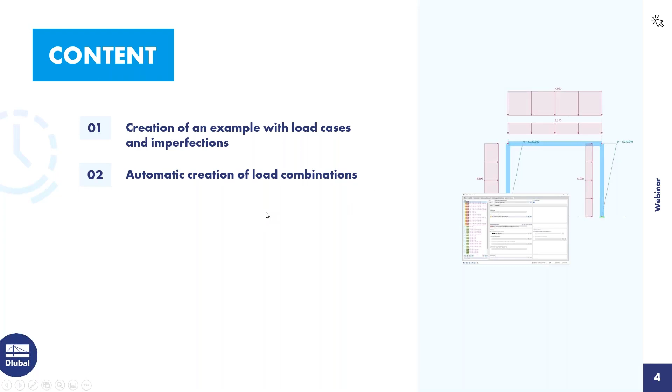To the agenda today, I will create a simple example. You can see that on the right side here. Steel frame, and I add load cases and imperfections. Then follows the automatic creation of load combinations. That's the main part of the webinar. Then reduction of the number of load combinations and consideration of initial states.

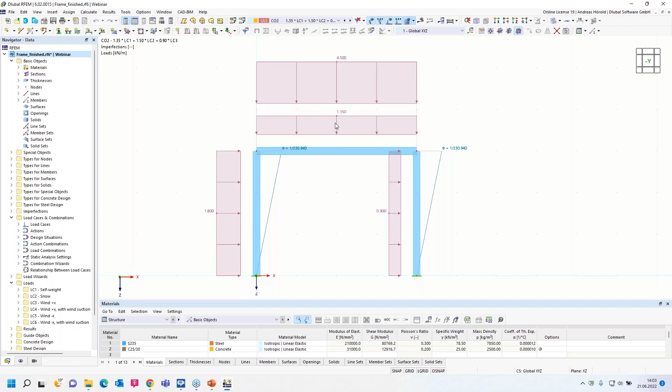Then let's turn to the program. That's the finished model, but to show you all options in all dialogues, I will start with a new model. Here left above, File, New. I call it Frame. 3D model is okay. Then it's important to check here Combination Wizard and Classification, that the load combinations are created automatically from the program. Load wizards for snow and wind. We don't use it for the steel frame. I can leave the check here.

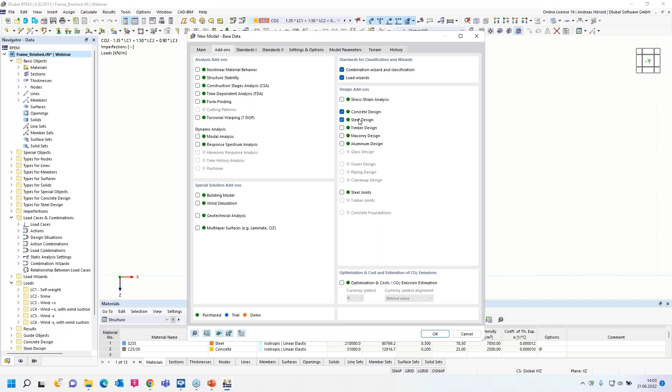I activate two design add-ons to show you where you can assign the design of the add-ons in the dialog load cases and combinations. So then standards 1, there are a lot of standards implemented for the load case classification and the combination wizard. I use the Eurocode 0, and we are here in Germany. I use the German National Annex, but as you can see, almost all national annexes from the European countries are included. We don't use any load wizard, but you have also a lot of standards implemented here.

Just a moment, I have to mute my colleague. Okay.

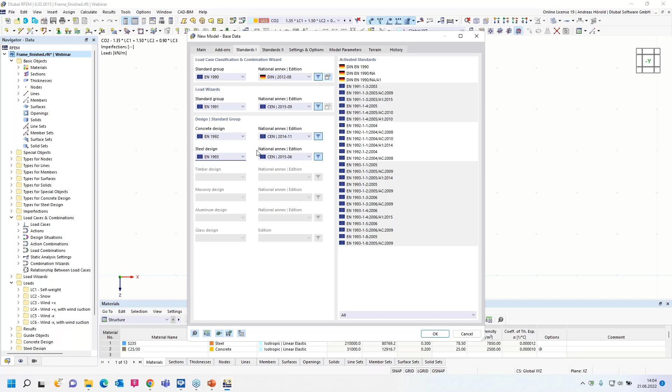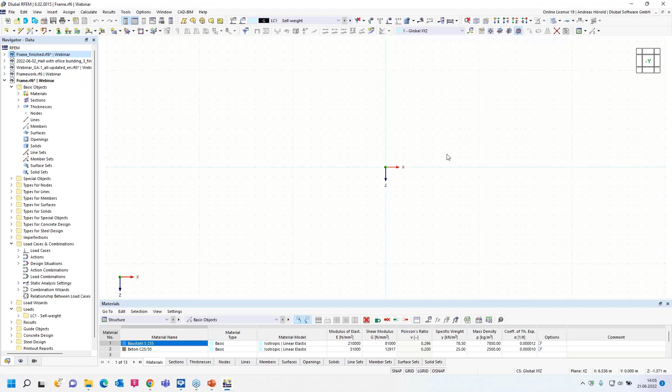Then, the design standard groups for concrete and steel, but since we don't do a design, I can leave the standard setting. Okay, then that's the new model. Here right above, I change the view in reverse Y direction and change the plane to XZ. So I zoom a little bit in and start with the first member here left above with a beam section. I use a section from the database, I-beam standardized.

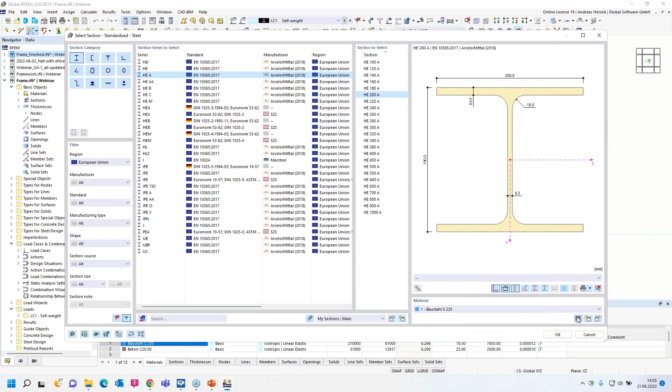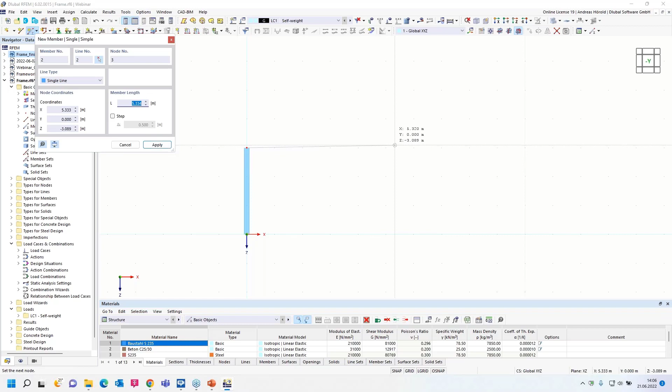HEA 200, and just a moment, I take a steel S235, okay, and leave the dialog. Okay, the column should be 3 meters high. Okay, then the horizontal beam 4 meters in X direction.

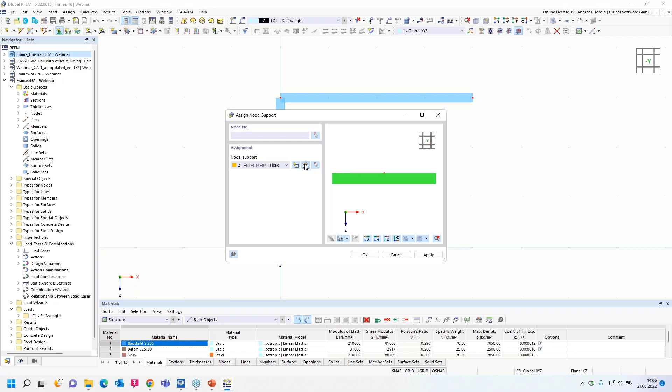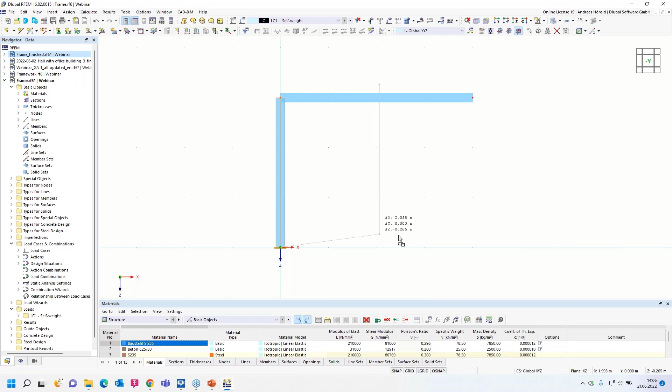Then I add a nodal support here left above, nodal support, and I use a fixed nodal support. Okay, we can take a look at the settings. Yeah, fixed in all directions. Also the rotational, all directions are fixed. Okay, then I add it here. And then with pressing the Control key, I can copy that via drag and drop to the other side. Now the frame is finished.

As you can see above, the self-weight load case is automatically created. We can add a member load for the self-weight load case, 1 kilonewton per meter. Okay, then I create a new load case with that button here, new load case, and I call it snow. I assign an action category according to Eurocode 0. In that case here, the snow ice loads with a height under 1000 meters. Okay.

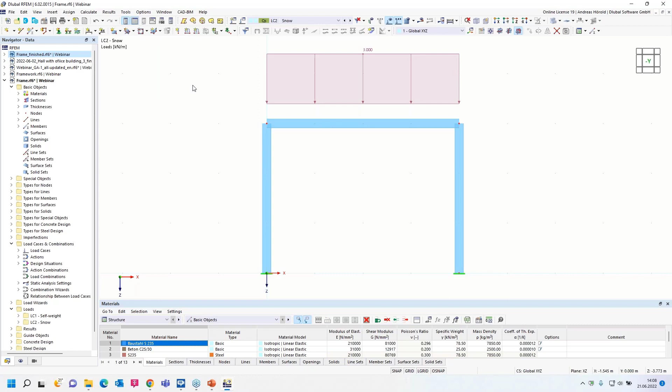So I add the next load. A uniform load, 3 kilonewton per meter. Okay, then the next load case, wind plus X. And I assign the action category wind. Okay. Member load again, this time in X direction, 2 kilonewton per meter.

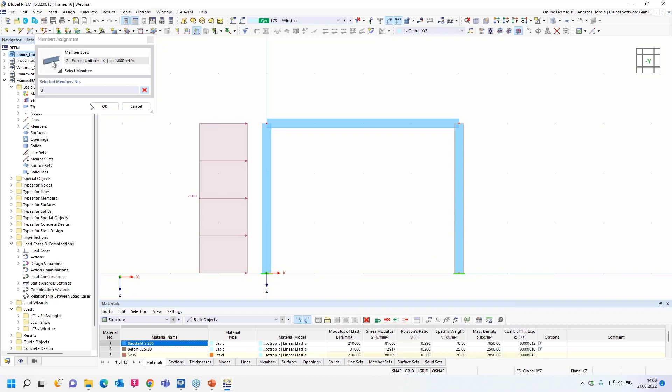Okay, I can reach the dialog with the Enter key. Okay, again in X direction, 1 kilonewton per meter. Okay, load case 3 is finished. And now I open the dialog load cases and combinations in the navigator data by right click. Okay, load cases. I will come back to that dialog later.

So now there are different options. You can create here left at the bottom, create new load case, then copy selected load case, and the other option is add loads to new or existing load case. I use the option copy selected load case. So I rename it and call it add with wind suction.

Okay, all loads are copied. You can see that we are in load case 4. I add the load on the horizontal beam, minus 0.5 kilonewton per meter. Okay, also this load case is finished.

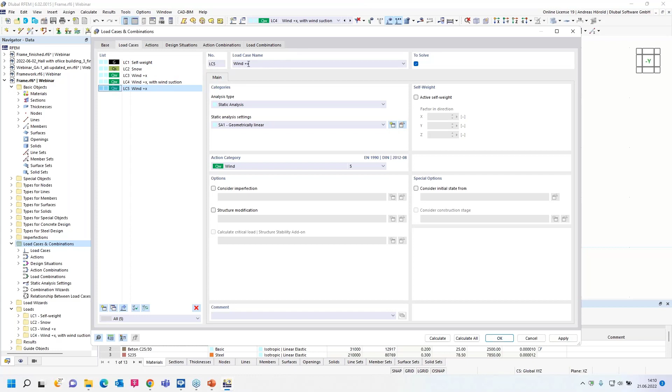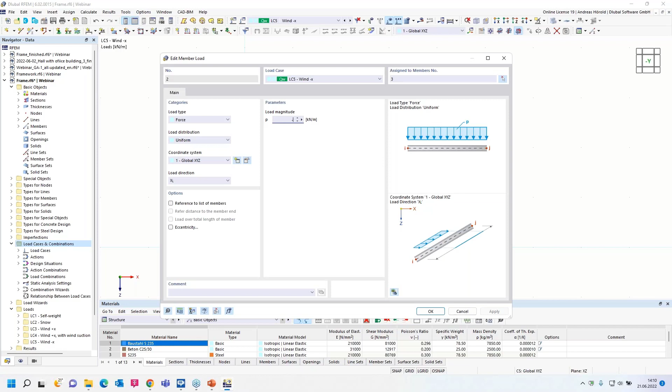Then the same workflow, I copy wind load case 3 again and call it minus X, or rename it in minus X. And with double click, I come to the dialog edit member load and I change it to -1 kilonewton per meter and this one to -2. Okay, load case 5 is finished.

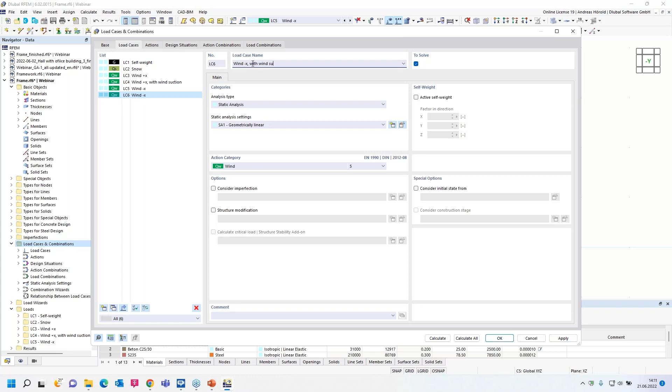And the same workflow for the last load case. I add with wind suction. Okay, and add the load on the horizontal beam. So all loads are created.

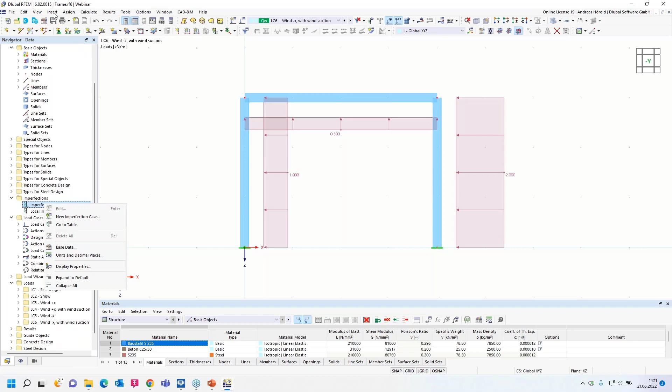New in RFEM 6 and RSTAB 9 is that you don't have to create imperfections as load cases. In RFEM 6 and RSTAB 9, you have to create imperfection cases and then local imperfections. I will show you the workflow. I could reach the dialog by right-click here in the navigator data, new imperfection case. The other way is to use the menu here above, insert, imperfections, imperfection cases.

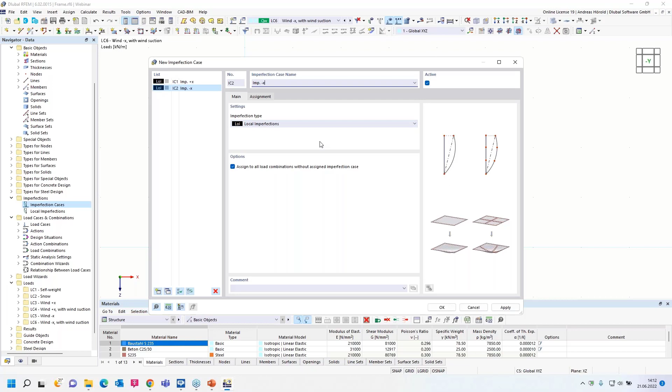So first imperfection case, imp plus X. And in this dialog, I have to assign the right load cases that act together with the imperfection in plus X direction. That is load case 3 and load case 4. Okay. Then new, at the bottom here, I create a new imperfection case, imp -X. Okay, and assign load case 5 and load case 6 to this imperfection case.

I leave the dialog and then I can create a new imperfection, a member imperfection, right click, new member imperfection. Yeah, I assign an initial sway on the columns according to Eurocode 3. Okay, that's also okay. Then I measure the height of the columns, 3 meter. Then 2 is the number of columns in one row. Yeah, and that's all. And I have to assign the right imperfection case.

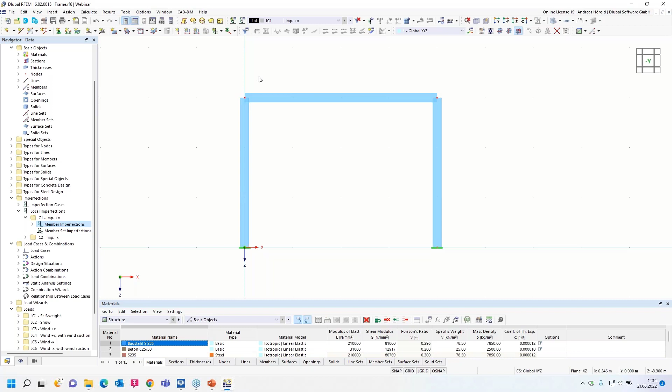Okay. So then I have to select the 2 columns. And here above, I have to show the imperfections. So first imperfection is created. Then I can create the imperfection for the imperfection case 2.

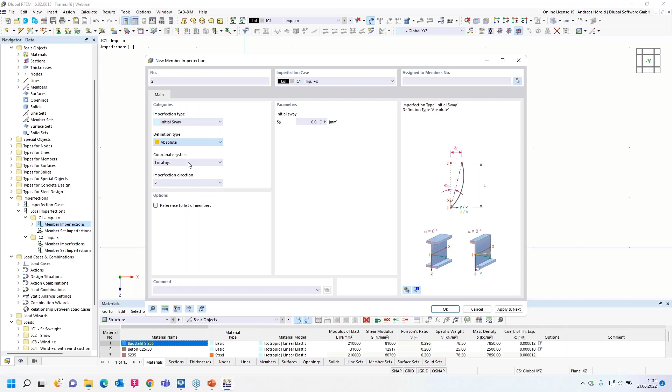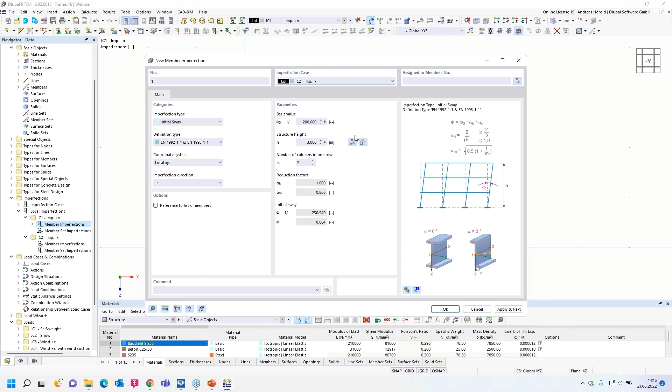I can do that here in the navigator data again, but I will use the option over insert, imperfections, member imperfections, dialog box. Initial sway again, the same definition type in -Z direction, 3 meter, and 2 columns in one row. And then I have to assign it to the imperfection case 2, imp -X. Okay, to select the 2 columns again. So this is imperfection case 1 and 2. So that's all to the imperfections.

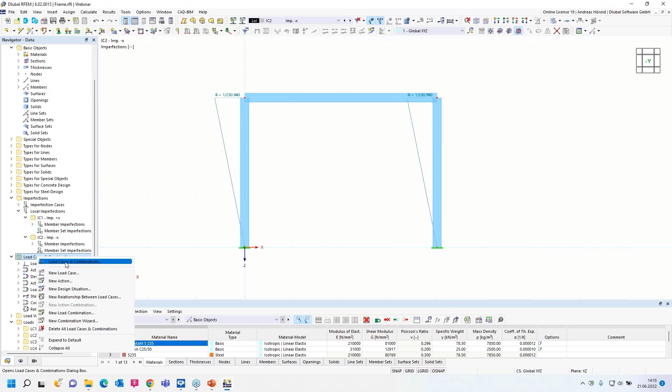Yeah, now all is completed, that means the imperfections and the load cases. And I go back to the dialog, load cases and combinations. I start with the base dialog. At the beginning, we selected the standard Eurocode 0 and the German national annex, and we already set this check. We use the combination wizard to create combinations automatically according to this standard.

So result combinations. I have to say in RFEM 6 and RSTAB 9, the most unfavorable constellations of load combinations are determined in the design situations. You can see that here. We will come to this dialog later. You don't need to create any load combinations for designs in the add-ons. As I mentioned, we will do that in the design situations.

Generally, load combinations are created for the structure analysis to determine nonlinear effects correctly. Result combinations, however, superimpose the results of load cases or combinations. It is maybe necessary, for example, for dynamic analysis. I will show that in the last example. Then we will use the result combinations and the sub-results.

Okay, then parentheses. For example, if you would do a criterion nesting, you could set combination 1 or combination 2 in brackets. That would be possible. And sub-results make it possible to specify additional combinations that can be used for the design. I will use that option in the last example.

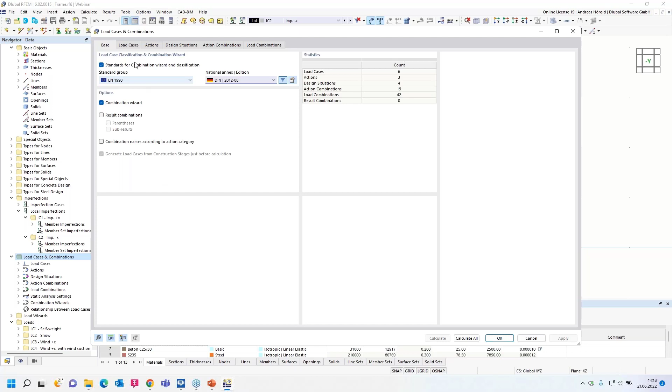So then load cases, we were already in this dialog. Maybe some additional information for the self-weight load case. The structure self-weight is activated by default. You can see that here on the right side.

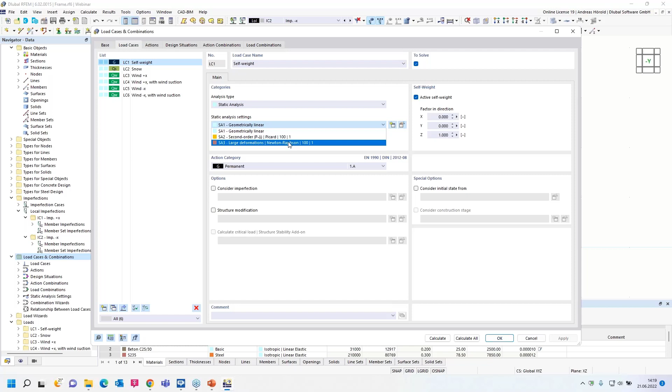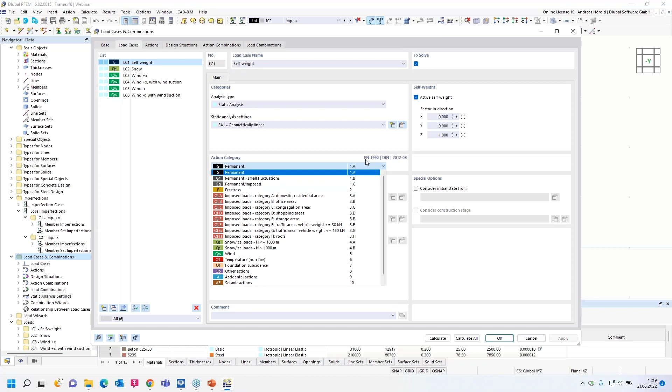Then the default setting is geometrical linear, but you have also the option to use the second order or the large deformations analysis. Okay, then the action category, you already seen that. According to the standard here, it controls the superposition of load cases and the partial safety and combination factors, according to the selected standard, in our case here, Eurocode 0.

Then the wind load cases, the imperfections are considered. You can see that here. Load case 3, wind in the X direction, acts together with the imperfection in plus direction. Also for this one, and the wind minus X acts together with imperfection case 2, imperfection in minus direction.

Okay, structure modification, consider initial states from. I will come back to these options later. So gray are also the add-on structure stability and add-on construction stage. As I already mentioned, I will show you at the end how you can find webinars about these add-ons if you are interested.

So then actions: permanent, snow loads, and the wind loads. Different action types are available. For example, simultaneously, all load cases of the action can be combined as desired. Alternatively, that's assigned to the wind load cases, only one of the load cases of the action can be effective in the combination.

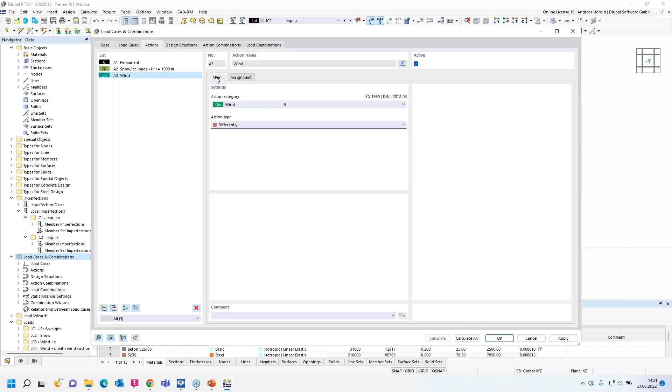Then we have the option differently. Load cases can be assigned to groups. I can show that. For example, I can add here 1, 1, and 2, 2, means 2 groups. Load cases act alternatively within one group, and load cases in different groups can occur simultaneously. So I change it back to alternatively for the wind load cases. That's all for this dialog.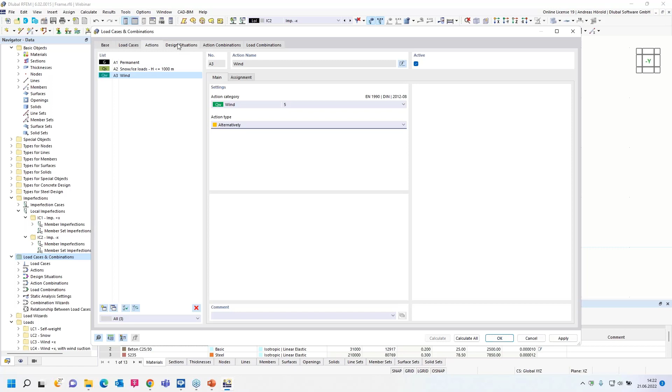Design situations: 1 for ultimate limit state design and 3 for the serviceability limit state design are created, and they are assigned to the add-ons, concrete design, steel design. Then combination wizard, I open the options here. Load combinations are preset since nonlinear effects and results according to second order analysis are only correctly determined by load combinations.

Then the static analysis settings here for second order analysis. I can go to the sub-dialog here. You can, for example, use another iterative method. You can change the maximum number of iterations if you have the problem that the calculation doesn't converge, and you can set also the number of load increments higher. So that should be all for this dialog.

Then options 2, user-defined action combinations. No action combination is created when you check this here, but actions must be combined manually. Then favorable permanent actions. Additional load combinations are created, for example, combination for design of lifting.

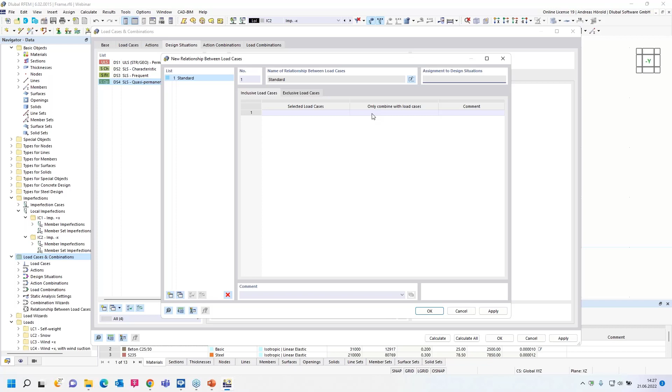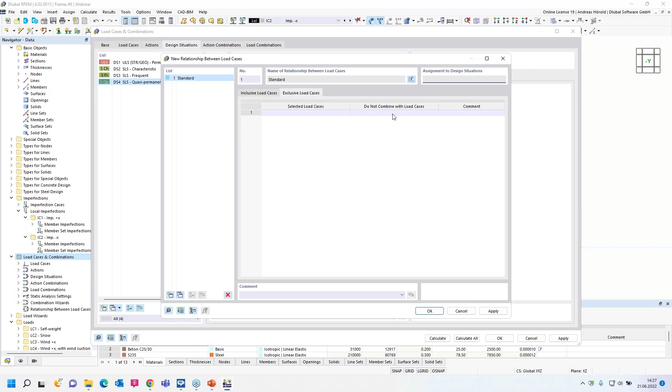I would like to show you this option here: consider inclusive, exclusive load cases. You can select one or more load cases and define that they are only combined with certain load cases. Or you can exclude load cases, so you select load cases and they don't have to combine with selected load cases. I don't use that option here.

So then action combinations. Yeah, as the name suggests, actions are combined now. For example, from action combination 3, we will get 4 load combinations, since there are 4 wind load cases in action category 3. So here, action combinations that are not relevant are set inactive by default. You can see 5 action combinations are inactive.

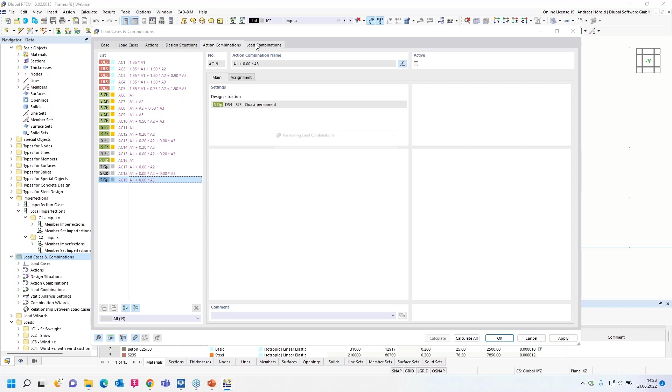So that means we have got 19 action combinations minus 5 means 14 action combinations, and we will get 37 combinations. 16 for the ultimate limit state design and the rest for the serviceability limit state design. And here left above, with that button here, it's possible to create or to add combinations manually.

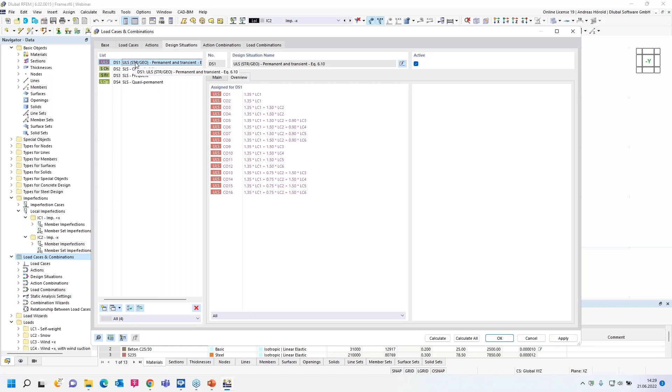So let's take a look again to the design situations. We can click here on overview, the assigned load combinations, characteristic, frequent, quasi-permanent. So let's try to reduce the number of generated combinations. We've got 16 load combinations for the ultimate limit state design. I go in the combination wizard and set the check here. So, and go to the load combinations.

As I said, 6 load cases are calculated at the moment. And we have got 16 load combinations, no reducing. That can be, just try it. And sometimes it doesn't reduce the number of combinations, because all the load combinations are important for the calculation. I will try that on another practical example later.

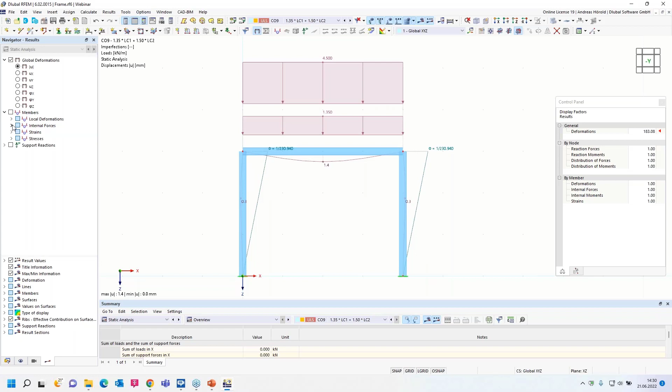So then I would like to show you the structure modification on this example. Let's calculate combination number 9. So that contains only the self-weight and the snow load. I displayed the internal forces, the My. So, and as you can see, the moment curve is quite symmetrical, almost symmetrical because of the imperfection. And I would like to reduce the stiffness of this column in that load combination.

How to do that? I go back in the load cases and combinations dialog, go to load combination 9, and check here structure modification. And we have to create a structure modification. There are different options. You can modify the stiffnesses of materials, sections, members, nodal supports. You can deactivate objects, members, surfaces, supports, and so on. I would like to reduce the stiffness of a member. I have to create the member modification here.

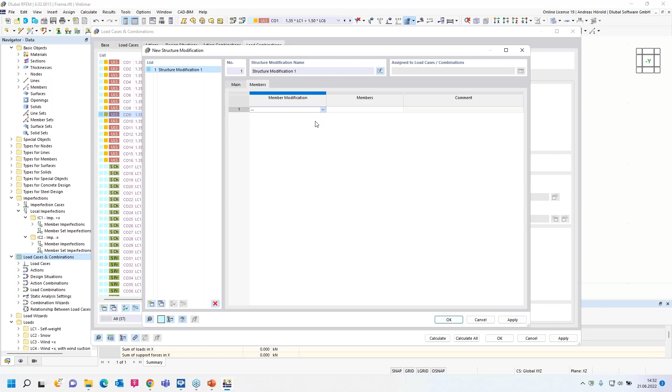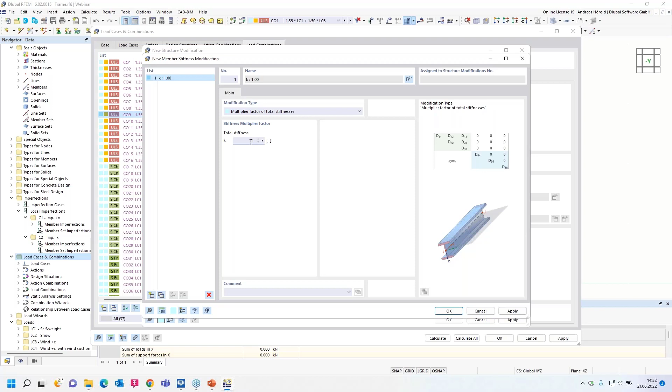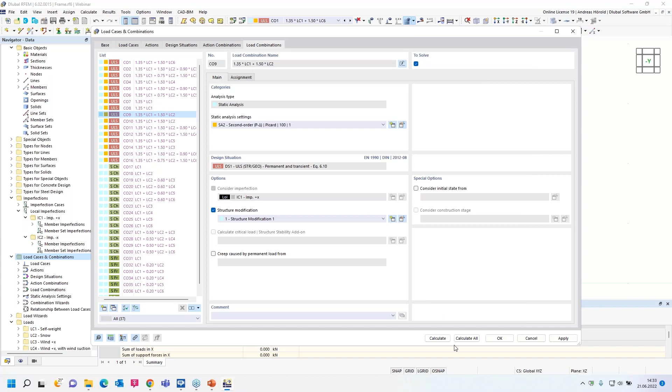New member stiffness modification. I use the modification type multiplier factor of total stiffnesses. You can see here that you have got different options for the American standard and Canadian standard and so on. Okay, I enter 0.1, which means the total stiffness is only 10% after the modification. I have to select the member, the right column. Okay, and can calculate the combination. And as you can see, the moment curve isn't symmetrical anymore, because this column has only 10% of the stiffness. Okay, that's all for this example.

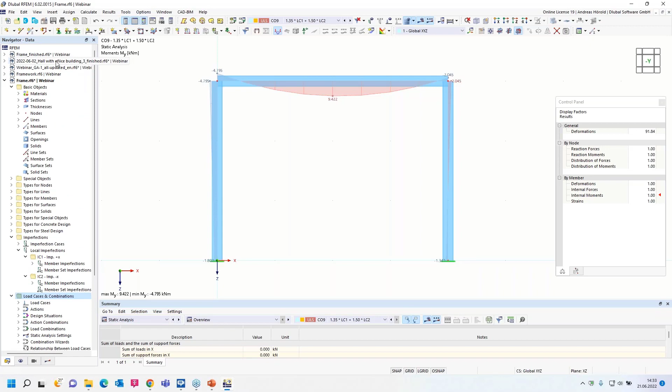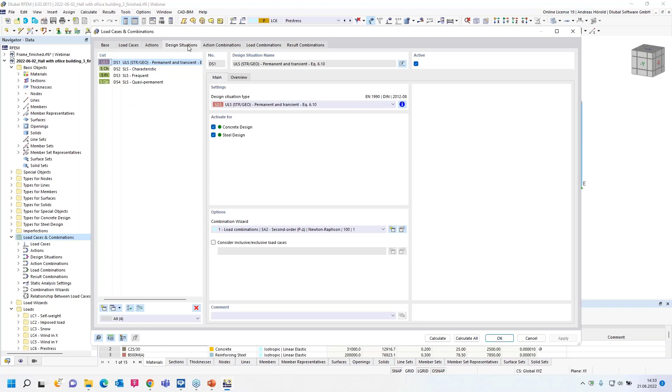I switch to the next example. Now that's a quite practical example. I think I created that and used it for the webinar 3 weeks ago. And let's try the reduction of the combinations. So ultimate limit state design. Let's take a look at the load combinations. We've got 26 load combinations for the ultimate limit state design. So, and for this design situation, I go in the combination wizard and check the reduce number of generated combinations.

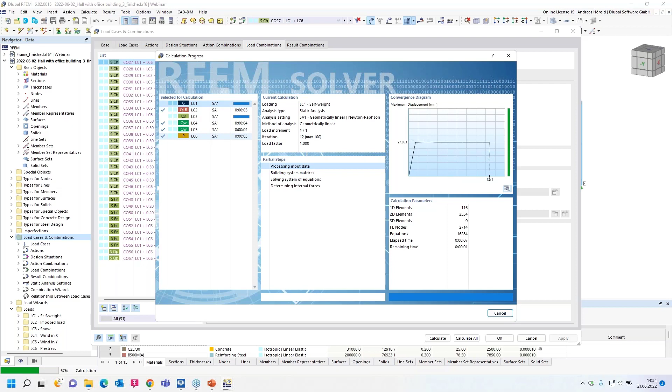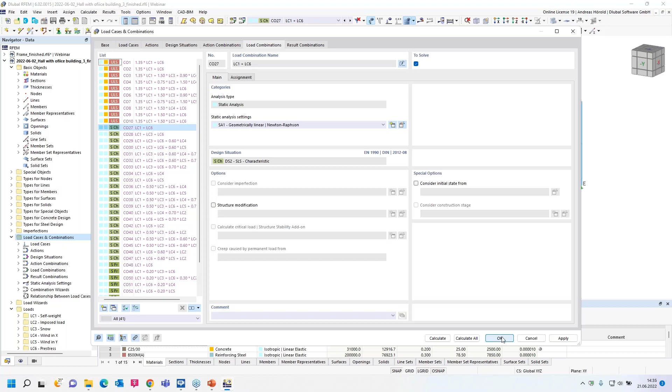So then the same workflow. The 6 load cases are calculated. Then the combinations will be created. We had 26, and after the reduction, we have got 10 combinations. Okay, as you could see, sometimes you can reduce the combinations, sometimes not. That depends on your models, on your number of load cases and number of load combinations, etc. Okay, then I can leave the dialog and turn to the next model.

This is also a model from a webinar, the geotechnical analysis. So, and you can see the model here, with a nonlinear soil model with different stiffnesses in various load situations. And we would like to consider the soil's initial stiffness that is loaded by the self-weight. So before I go in the dialog, I go back in the PowerPoint.

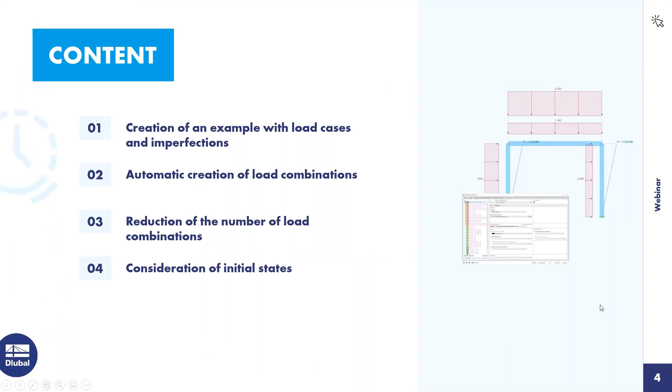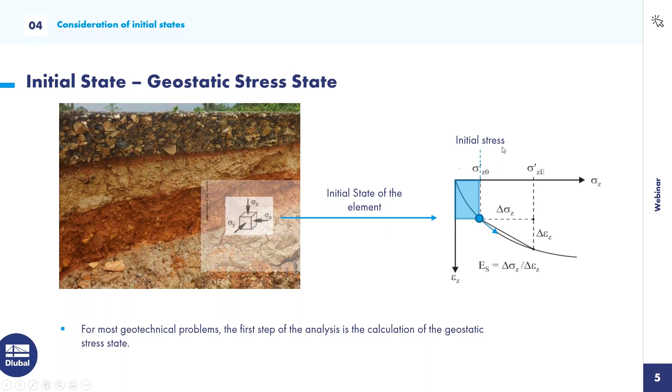Okay, let's go back to the program. We go to the load combinations dialog. So we have different load cases: self-weight of the superstructure, dead load, live load, snow, and the self-weight of the soil. And the self-weight for soil solids is activated. This is this action category.

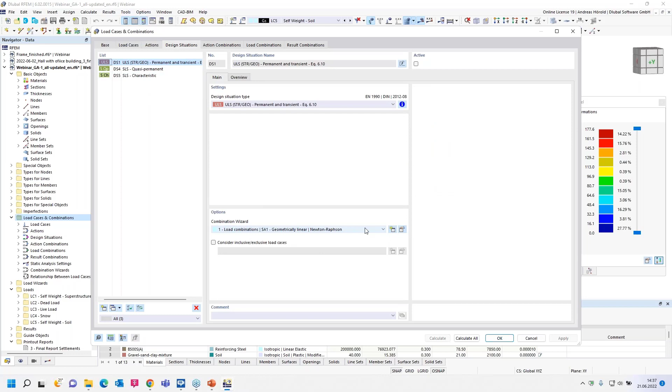It's not necessary to calculate these load cases, only later in the load combinations. So then I showed the combination wizard, and it's checked consider initial state from load case 5, self-weight of the soil. Okay, then we get 2 load combinations.

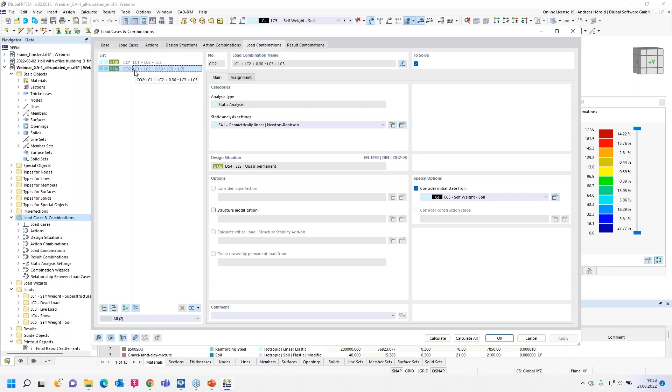The load combination 2 is decisive, so we created result combinations, one result combination. Load combination 2 minus load case 5 means we subtract load case 5 from combination 2. That won't be necessary in the future. We work on it, but at the moment we solve that with creating a load combination.

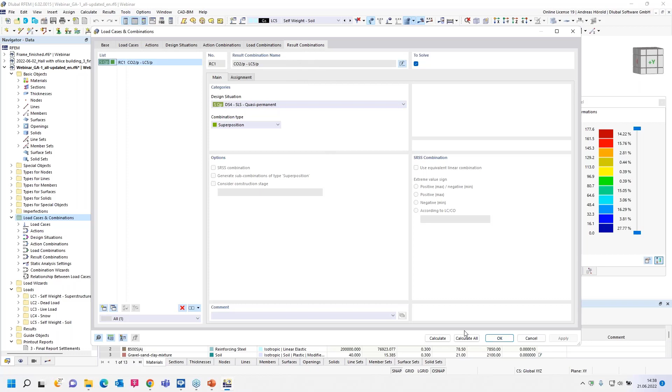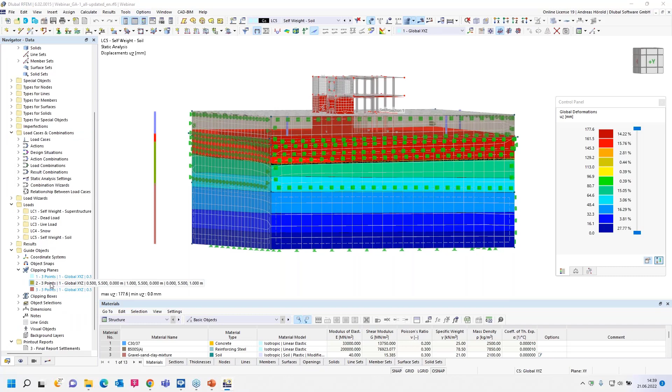Let's take a look at the program or at the graphic. Load case 5, we get global deformation of 177 millimeters. Let's take a look at the clipping plane. I left both—there are clipping planes. I activate this one so I can rotate it.

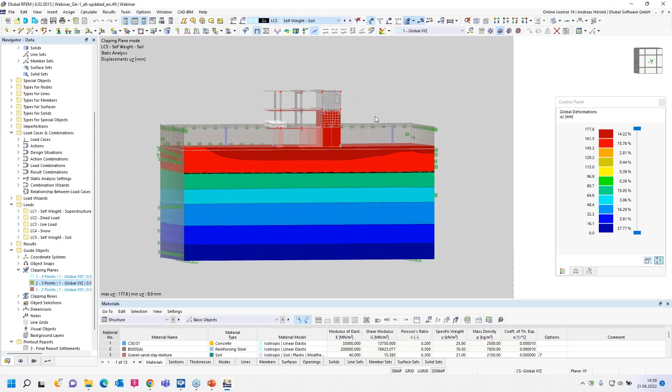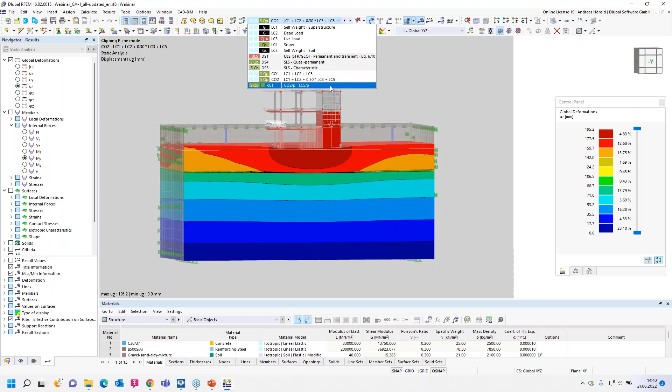As you can see, the building here hasn't any influence for the self-weight of the soil load case, but then in combination 2, the deformation of the self-weight and the deformation caused by the building is added, and you can see a global deformation of 195 millimeters. Then we subtract the self-weight load case, and now you can see the right deformation under the building, 30 millimeters.

Okay, that should be all to the initial state. I turn to the last example for today.

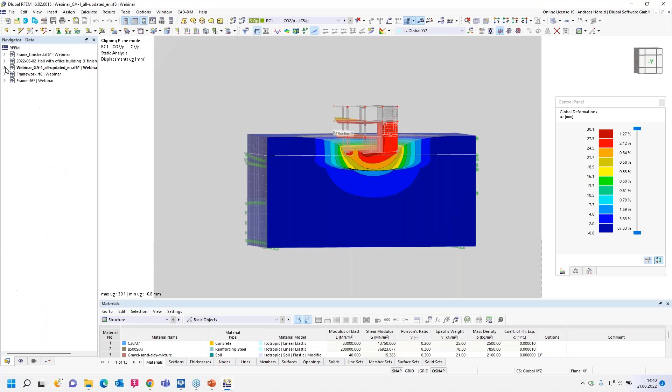I would like to show you a model with result combinations. I open the dialog here. As you can see, the result combinations are activated, and also the sub-results.

Standard for the combination wizard and classification is Eurocode 0 again, and the German national annex. So let's turn to the load cases. Load case 6 for modal analysis, and load case 7 contains the results from modal analysis for spectral analysis.

Then the actions. Action 4, seismic action, and load case 7 for the spectral analysis is assigned.

So then design situations. Design situation 1 for determination of mass combinations for modal analysis, and design situation 2 for accidental design situation for seismic load in the ultimate limit state. And when you select, for example, or activate the steel design or concrete design, then you need to activate them here for the ultimate limit state design.

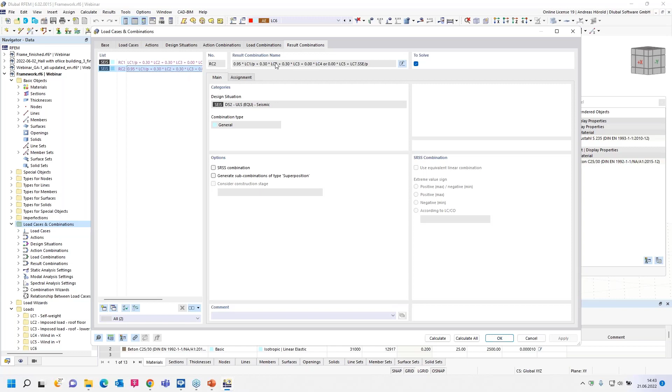A new feature in RFEM 6 is that the result combinations are automatically created. You can see that. And what I need to say, at assignment, you can see the selected or assigned load cases, and I activated sub-results, and you have the possibility to superimpose other partial results here. Okay, that was the example for the result combinations.